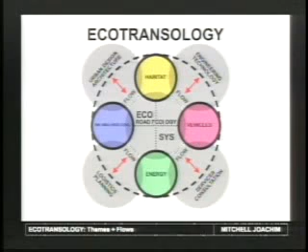So this is the beginning of this burgeoning field that we're calling transology, or eco-transology, which describes patterns of mobility. These are some of the fields and the contexts in which these fields operate. So there's this Venn diagram that's kind of showing some of the relationships, making this into one primordial soup of thought. And these are the four parts that I've just gone over that I'm going to discuss.

First part being the history, or the ideation, or the visioning of future cities. And then into the eco, which is really thinking about architecture and sustainability in buildings. And then transportation, then eco-trans.

So let's get into the first part, ideation, which is divided up into a series of challenges, archetypes, infrastructures, and deployable spaces. And finally, our own suppositions on smart mobility, or theories on smart mobility in cities.

Especially using technologies that have been around the Media Lab for some time.

The biggest issue we had to deal with was energy use in the United States. These are facts from the U.S. Congressional Budget Office dealing with the transportation sector. We divided it up into industrial, commercial, residential, but transport here is 29% of the consumption of energy in the United States. This is expected to double, as a common statistic.

What we were looking at specifically was intelligence to deal with something like circuity. Some of you must know this, but for the sake of this talk, circuity is getting lost, looking for parking, poor navigation, driving around, just not going anywhere. Instead of getting from A to B, you go from A to B to C to D to E. Eventually you get there, but it wastes a lot of energy.

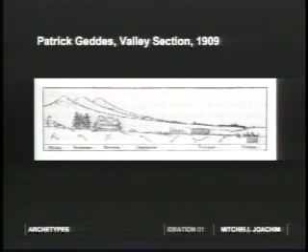A lot of the stuff I do in city theory has also been around for some time. One of the greatest thinkers we need to give credit to is Patrick Geddes and the Valley Section, where his position was that the first effective road, especially for freight transportation, was rivers in the world. Most cities are designed around rivers and pathways. Here he's talking about the interfaces of human operations, actors and agents on the landscape, cut through a section of a river from the mountainside all the way to the edge of a lake, for instance.

This becomes important later because we've decided to rethink that interface. Here we're thinking of the pickaxe for the miner, the axe for the woodsman, or fishermen with their fishing rods - but what are the transportation interfaces that affect cities and affect the landscape?

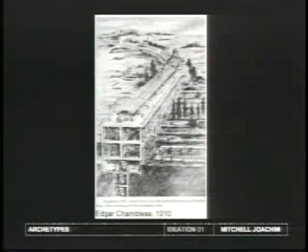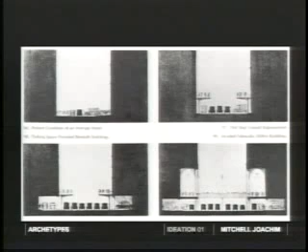These are some other visions: Edgar Chambless in 1910 thinking of these munificent road towns. Corbett, a congestion engineer - I guess he was a Columbia professor, really fantastic guy - also thinking about infrastructure in relationship to bridging, tall buildings, and transportation. His diachronic drawing shows sections of how the city would develop or evolve over time to deal with congestion and transportation, separating pedestrian use, and carving into the architecture to supply places for safe passage for people and families, and places for fast mobility, slow mobility, and parking storage.

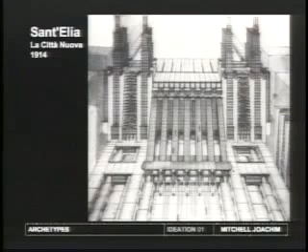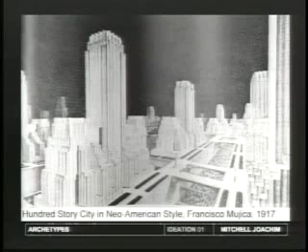Sant'Elia - big movements in the art world, Futurists especially - this is one of the best. This new city, as he was calling it, made a spectacle of mobility, where he extruded elevatoring systems outside of the cores of the buildings and obviated them into the architecture. Other views are a little more Nazi-like, with endless repeating 100-story towers and grand boulevards above them, and civic spaces inside, with this canyonated series of congested vehicles moving in and out. I think this is basically the precursor to the BQE.

And then a great transologist, Eisenhower, back when he was a lieutenant colonel, and his contribution especially to U.S. transportation. Some of you may or may not know about this, but he was certainly a thinker about mobility in the United States - even today we think of red and purple states and how he separated them. It started back in 1919 in his transcontinental motor convoy, where essentially as a military act, a war game, he said: what if we had to go from D.C. to San Francisco to defend the United States of America? Is there a road system that can do that?

So here he is trudging through the mud trying to show that, through moving tanks - or well, they didn't have tanks, but jeeps and armored vehicles and soldiers - it would take months to get across the United States to defend it.

This ultimately led to an act of Congress to establish the American highway system, especially after seeing what the Germans could do in World War I and II with the Autobahn versus rails. If you knocked out a section of the Autobahn, the Germans were running on it the next day or in hours. It was easy to repair a highway, as opposed to a rail system, which if knocked out, supplies would be cut off for a long time. So the highways in the United States were started as pretty much an emergency act of war to protect us. It's kind of a well-known fact, but maybe some don't know this.

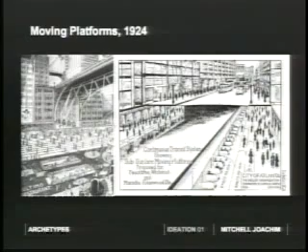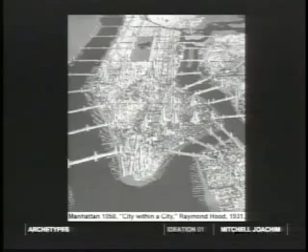These were proposed in Atlanta. And then bridges themselves becoming architecture and urban design. Here's housing built into bridge systems. This is an interesting view of Manhattan, Raymond Hood, thinking of clusters of skyscrapers connected and bridged, and then Manhattan also hyper-bridged with housing built into the transportation. So exactly who would be responsible for designing a piece of infrastructure that's architecture, of public housing, deals with multi-levels of mobility from trains to cars to pedestrians. It's been a problem for 100 years.

And of course, Norman Bel Geddes in Futurama, another view of the future. And Hilberseimer, escaping Nazi Germany, and his view of what we could do with Manhattan based on transportation. So here he is. I kind of love this sketch because of the chutzpah involved. He's wiping out Manhattan and replacing it with a big transportation node and then dotting slabs of housing in the center. Great. So when does this become interesting?

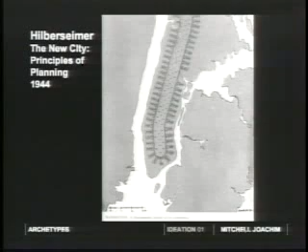Well, when you deal with a calamity like New Orleans, where the city is wiped out, and you have to rethink most of the city, how do you create a pedagogy, or who's prepared to really redesign it? It's usually groups of people getting together, but I think this is something that could happen at the academic level first. Today we do a lot of incremental phasing, and urban design is project-based. It's not entirely city-based. So that would be an example of let's start from scratch, or degree zero city design.

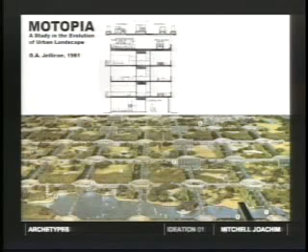Louis Kahn in Philadelphia, thinking of clusters of skyscrapers or tall buildings and housing combined with parking and mobility. So architects have been thinking about this. Landscape architects, Jellicoe's Motopia. Here are these nodes across a matscape, or just the land is in the switch fabric between civic places and housing and then mobility. So basically, cars move above and you dwell underneath.

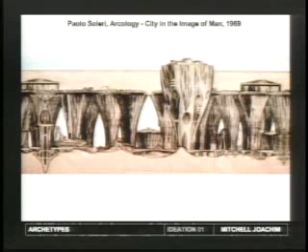Archigram, one of my favorite groups from the 60s, they were thinking about, well, let's just have cities themselves be mobile, or walking cities, and many other iterations of that. Soleri's Arcology - this guy's making mud pies in the Arizona desert, but he was certainly thinking about this miniaturization of the city into this very compact notion of infrastructure and dwelling.

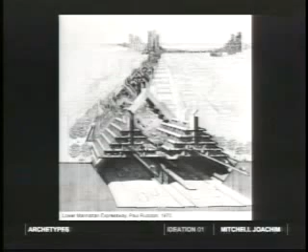Paul Rudolph, thinking of the Lower Manhattan Expressway. In this case, these topologies, and there's many others like it, but I'll use this one as an example, about the spine. So development along the spine that accounts for orientation, light, air, and then transportation underneath - slow motion transportation, local transportation, then fast moving transportation from region center to region center, and then, of course, in the background, clusters of skyscrapers connected.

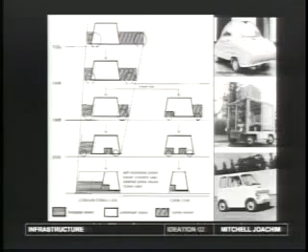And thinking also about intelligent storage of the vehicle itself, robotic parking systems, and robotic systems where the elevator and the car bleed into one. In this case it's a transcar system.

Hospitals use them, but they're leaving the core, right? The elevator core. They leave the realm of the circulatory space in the building and travel throughout it, then go back in. As a kid I was always fascinated by Star Trek, how they possibly navigated through these elevators through the Enterprise, as it clearly wasn't a vertical shaft—maybe it was something like one of these transcar devices, traveling through the floor space on a robotic elevator.

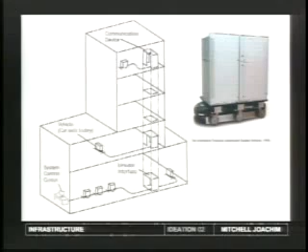How can we get rid of clanky metal boxes and this chainsaw-to-cut-butter mentality? So much energy is wasted producing a vehicle like this. The elevator itself is a really elegant system, especially from a physics perspective—you pay some energy to go up, but the counterweight gives it back when you go down. So elevators become super important. I'll show some of that later.

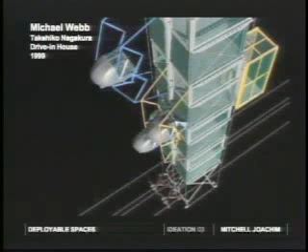Other variations on that theme where the cabin leaves the realm of vehicle propulsion and enters the space of, for instance, an apartment system that's also on rails. This was Takahiko, a professor at MIT. I had worked with Michael Webb on some of these animations.

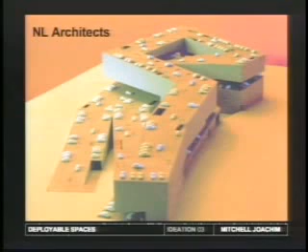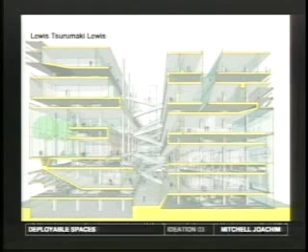NL Architects—these individuals thought the very topology of the building itself would be influenced by parking and transportation, or basically the car itself would form the architecture, the other way around. And Lewis Tsurumaki Lewis—you have to look carefully in this image, but in the interstitial spaces you have vehicle parking, and then your offices above it where you work. From an efficiency standpoint this isn't so great, but it's different when you start interleaving the parking program with occupiable floor plate into the building itself, as opposed to Marina Towers, which divides it in half, parking below and dwelling above.

It gave us some really good questions—cities have been designed around vehicles, at least modern cities, and before that they were designed around horses. So how do we design the car around a city?

Road ecology—Richard Forman, a professor of mine at the GSD, was a phenomenal influence in thinking about the vehicle and its effects on the road. I think road ecology as a discipline is super important, and would be part of this pedagogy too.

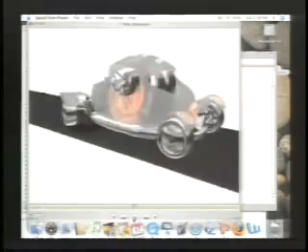So e-ink and organic LEDs would do some of these things, like social projection. So the cars can display something on the outside, like the Red Sox rule, or whatever. But when you start thinking of a field of these cars, you need human communication as well as vehicle-to-vehicle communication.

Back into it. And thinking of not only the vehicle itself, but the entire informatic of the cityscape becomes one. So it's not just a veneer, an intelligent veneer, but there actually gets to be solid and intelligent and actuated systems that are all speaking and talking in this future city.

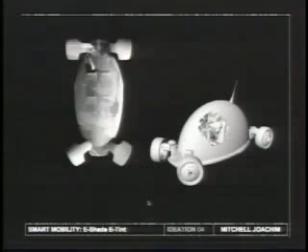It's probably not going to play again. Well, what you saw briefly was basically you can have a visor that would track the sun to deal with some environmental concerns, stop shading, or the skin can be completely opaque and transparent following the viewer's line of sight.

And now we get into the interface of the vehicle itself. So this matrix takes some time to absorb, and I'm not going to unpack every inch of it, but it's basically the history of the city versus mobility, or not versus, but aligned with mobility. We're calling it TUI, similar to a GUI, like a mouse and keyboard or graphical user interface.

This is a transportation user interface, and it starts from the foot and the hoof and the wheel, things that influence the shape and form of cities, urbanization, and pretty much the world. Our supposition is that after the rail comes what we're calling the net wheel, or networked wheels. We decided to really rethink the wheel for the car.

We put the entire solution space of the car, drivetrain, suspension, motoring, intelligence, everything happens in the wheel. And then you just add an envelope, and you add wheels to each other. And these wheels talk, and they're smarter than people at some level.

If I walked 5 blocks down and made a right, what's the name of that street? And is there a pothole there? Unless you've walked it every day, you wouldn't know that. But if wheels are talking and connecting to a municipal grid, constantly re-recording the cartography of the urban space, they would know something like that. They can warn wheels ahead of them: there's a pothole there, don't go there, etc.

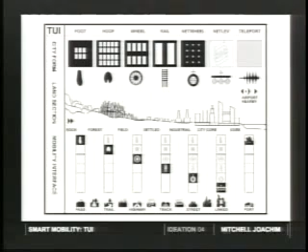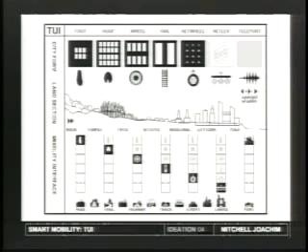Then here comes the wheel. Cities designed around the wheel are much larger and not so comfortable, canyoned spaces, and rail cities the same way. And then the net wheel, which is this intelligent, super-connected city. We're thinking this operates in the city core, downtown, between industrial areas, post-settled areas, to edge areas, and there'd be a linked system that would bring us into the 3D, or vertical axis, Z mobility.

We're tired of the precious metal box, right? Don't touch my car, don't scratch my car, don't look at me in my car type vehicle. Here we're saying it's a gentle congestion, touch, bump, rub, soft, it's okay, because we're going to get there faster and traffic is attenuated. You can think of it as moving like a bloodstream, oozing with passengers seeping in, seeping out... oh, there it is. So you can imagine mobility like this in the future with these soft cars.

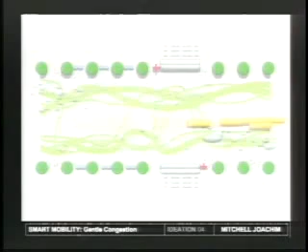So we had to go and build it. We started with the wheel and getting to the skin. Let's see some of that. This is showing it phasing into the city.

A lot of questions I get is, well, softer cars... we're already there. When you introduce something hard into the system, something that doesn't even have a crumple zone, barely, like a Hummer, which is this precious, super strong, metal, impervious box, you make everything else softer in the city. So you're kind of doing that already.

These vehicles are certainly... I think the reason for a Hummer is that you buy one for your wife, supposedly, so that when she gets into an accident, she kills everyone around her, but she's safe. So this is this kind of view of phasing softer, gentler, sheep-like cars into a city and dealing with things like Hummers that we know will take them out rather quickly.

But speed, again, is a factor. We're moving much slower in these cars. It doesn't need to go faster than 30 miles an hour in a downtown core. That's a shared ownership model.

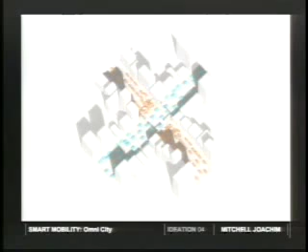But I should probably show this video. Here's saying what it's going to replace, which is command signals, gradient changes in curbs, light switches, all of these things that we're psychologically prone to following orders to. There's no real reason to stop at a light. We just think we're going to get killed, but nothing really stops us. So what if the cars really do stop you?

This is a car designed around the city, and then the city changes to readapt itself to a car that's adapting to it. So there's constantly an exchange.

Moving from regional center to regional center, this is looking at critical moments between tall building clusters, accounting for light and air, and then transportation. I've got to come back to that one in a bit, and a city based on that influence.

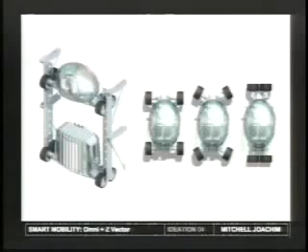So here's the beginning work on the wheel and its omnidirectional capability and its z-axis capability. You can see that it moves, it spins on a dime, laterally forward. It's talking to each other. It's based on the GM skateboard that's been modified, cut up, and made a little bit smaller. I think the powertrain for this was a fuel cell.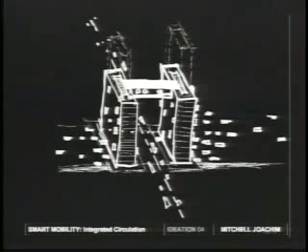And then the wheels can clasp onto rails and engage facades, and you'd have both passenger and freight transit inside these systems. We're thinking that it's influencing the city, right? So they're sticking to buildings, gliding over. Buildings are bridging, vehicles are bridging. So here's a first sketch of that.

Well, what exactly does that do to a skyscraper, right? So it took a year of research at Moshe Safdie and Associates, a really great firm here in Boston, where we started looking at tall buildings and, more importantly, questions we didn't really have answers to, which is clusters of tall buildings. That came really down to ecological relationships between cores, elevator systems, and skin, and then ultimately bridging.

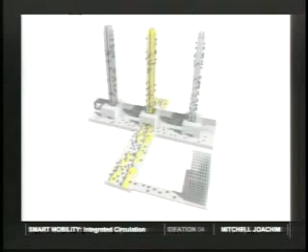So here's this supposition of the city of bits, all of these vehicles fitting into the city, moving up cores, fast sections for fast transit just through the basement levels, massive charging stations, floor plate stacking and bridging. There's a lot of benefits to bridging tall buildings, which I'll show later.

And the buildings themselves becoming actually mobile, with sections leaving the building core. So how can we do that? Because we want the building itself also to be mobile. So here it is kind of fragmenting up.

So let's get into the eco part of the architectural area and then into the cars themselves. This is just 3 quick projects I'll show you that I've been working on to think of 100% really sustainable or ecological architecture.

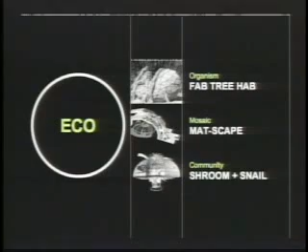This first project is called the Fab Tree Hab, which is about pleaching inosculate matter, or grafted sections of trees, to grow superstructures for housing.

The notion here is that sustainability as a philosophy is a little bit too status quo. You don't want your marriage to be sustainable. You don't want your relationship to be sustainable. You don't want really anything to be sustainable. It means just getting you through the next moments, or even a couple moments beyond that. But it's not evolving, changing, living, loving, growing. At some point you need to think of the evolutionary aspect.

So I'm thinking more of an ecological architecture, which is different from the sustainable philosophy. Ecology is a science, and here it's a science of horticulture and botany. This has been around since before Rome, growing trees together to form shapes.

Part of the work I've done at MIT was on CNC-controlled geometries—basically printing out complex geometries and marrying it to the idea of living systems, or pleaching systems, that we've been using in gardening since before Rome. Grafting trees happens in fencing.

So this is a notion of an entire community that's actually 100% living. No felled timber, processed industrial timber, or even transport to bring building products to the site would be involved. This is a 100% view of the future that's holistic and ecological.

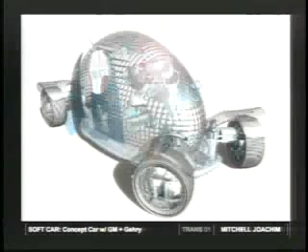So thinking of these super soft, informatic skins. In this case, it's made up of quilted ETFE pillows with embedded electronics, some starch foams that support various parts of the car, and then an internal safety cell that would not be edible. It would have to be something like aluminum to absorb impacts.

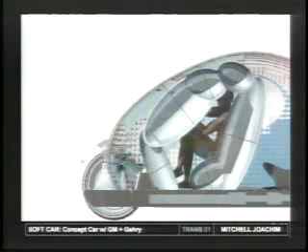But that helps keep the skin in tension. And thinking of the car as a series of, it's just air, right? It's all soft. It's an air quilt, and the seats are air bladders, with 6 points of safety using airbags. We know the benefits and constraints of airbags, but it was one early iteration. There's probably 50 or 60 iterations of this soft car, and I think the latest version is ready to roll out in November.

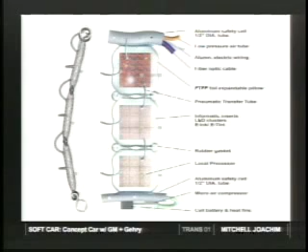So I don't have the final version to show you, but we will soon enough. This is a section through these ETFE quilts, embedding smart geometry in the quilts to give them more stiffness and structure, and transfer low pressure air between quilt to quilt from microcompressors on the car.

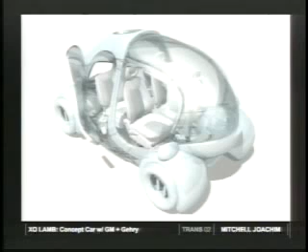And the XO Lamb car is another view of the super soft car of the future with brush wheels. I think the idea would be it's okay if you roll over children, like a Nerf car—it couldn't possibly hurt you. A lot of these things we were saying and doing, you'd get fired for if you worked at General Motors. But we did really say these things and do these things.

Instead of car refinement, we just rethought the car on base humanistic principles—like no one will ever die in a car accident again, not on our watch. Here's another version of the soft car.

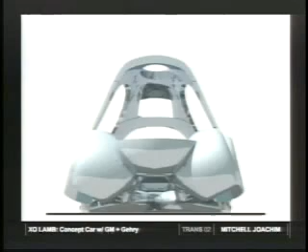In this case, we thought of a super safety mechanism called the friction belly. Here you think of the contact patches of the wheels—there's just those little points. But when, let's say, you've lost control or are about to be in an accident, the entire belly of the vehicle increases friction on the road to slow the vehicle down. So you can see the difference between those.

Then there are cars that expand and contract with these soft skins—here's an Exodillo version. Now, Frank Gehry—I was working at the office in L.A. as an architect for a cluster of skyscrapers in Brooklyn called Atlantic Yards. But for this project, which I started on, he was the lead author and designer in the beginning. At some point there was an argument over design fees, so I don't know where he stands on that. But in this version, and in many versions, he had some really brief comments about what he thought. He said this one looked like Nemo's submarine—get rid of it. So we got rid of it.

There's a 3D print of Nemo's expandable submarine, and here you can see a close-up. This was for Popular Science—the wheels with the suspension. It's basically a hubless wheel with all the car we can fit inside it. And here's another version.

That vehicle, and things about the structure in relationship to accidents and dynamic cabins—we had a young physicist in the group, an 18-year-old whiz kid, Louis Basel, who said, hey, we got to rethink the physics of the car, especially in accidents. We absorb a lot of impact and velocity in crumple zones. Well, what if the cabin was dynamic and moved within the line of force of the human body? The doctor said, well, that's a good idea, let's think about it.

So I started these drawings rethinking the structure of the car, which is essentially a brick on wheels, and thought of a suspended cabin from one particular pivot point in a wishbone-like truss system. So you just hang the car on its wheels in this truss, and the soft egg inside can move in any direction with the same vector of force as the impact. So with the initial impact, you move with that line of force.

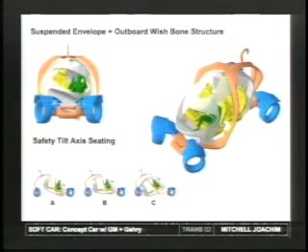And this became what we call the soft bone car, with an added hook for storage. Essentially it's the same kind of soft cabin, suspended though from a wishbone structure, with a safety cell around it, of course.

We got tired of this continuous aesthetic of softness and wanted a self-healing fabric for the cabin of the car. So we rethought the overall aesthetics of matte or soft cars, similar to sneakers. I went through a series of iterations of quilted car patterns that are okay to scuff, okay to rub up against.

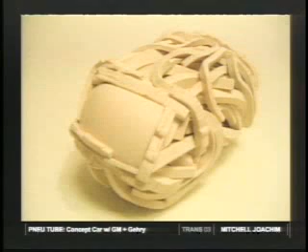Here's a pneumatic tube version, and the windshield and windshield wiper. For car designers and engineers, the holy grail of transportation engineering is the windshield wiper—it's on the space shuttle, the Concorde, every vehicle. If you can think of a better solution for dealing with all weather conditions, let me know. Fifty years of doctoral study on windshield safety glass made that one point of the car hard to change.

We looked at a lot of technologies. But besides the windshield, the rest of the vehicle is super soft. We were in line with Reebok, who came by as another sponsor of the lab, so we thought: let's make sneaker cars. What are those guys doing with the fancy sneaker technology we're purchasing every other year or so, and how do they do that?

The most sneaker car designs I've seen basically take the look of a sneaker and style a car after it. We weren't concerned about style—it was about material, softness, scuffability, and economics. They're cheap, so why not have a cabin you can turn over every couple of years, made out of sneaker-like material with the same sneaker-like aesthetics, stitching and materials.

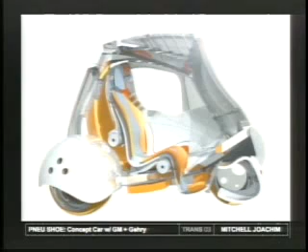So you have a zipper door—you get in and out with a zipper. I really love that one. Then another model where the shoehorn was the seat that stretched the rest of the envelope of the car. This is a three-wheeled vehicle that's omnidirectional—of course all of these are omnidirectional—really getting the footprint of the vehicle down.

Here's a planimetric view cut showing the section of this cabin in this future car that's wireless, drive-by-wire, omnidirectional, a networked wheel vehicle made out of sneaker-like skin.

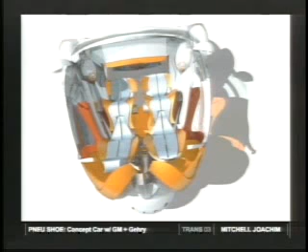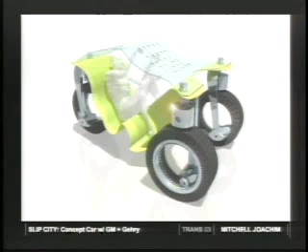And impossible fantasies of shape memory alloys—thinking of what's the smallest footprint we can get for these sneaker cars. Here, one layer would memorize the contours of the body, and when you want to store it, the entire car folds up. How does it support itself? Well, it's intelligent tensioning between the wheels that keeps the skin stiff.

Thinking of even smaller footprints, which is standing—this is the car for downtown, kind of like an iPod car or cell phone car. It's a leapfrog technology; cell phones have changed a lot. We think: I'd like to just get to some place and not have to worry about my transportation at all. So here's this kind of standing or somewhat squatting car. The reason is that it's the smallest possible footprint in plan the body can make.

As opposed to sitting, if you look at a drawing there are actually more protrusions, so this hides your feet, which normally stick out depending on the proportion of your body. These are the I-stand vehicles, also using the same tensioning between intelligent omnidirectional wheels that are networked and stacked. Here's the stacking part—I'll show you some iterations of the stacked car.

This is the wheel technology—I think this is Peter. Here you can see one of our wheels; I think Louise is riding it. Basically the whole vehicle is in the wheel, and there's just a battery he sits on top of, plus a bicycle wheel. This is one wheel that would be added to four wheels, and he's not wearing a safety helmet—we're just speeding around the Media Lab.

This is showing he was still—this, I think, was the second iteration. Each one we've been patenting. There's the wheel car zipping around.

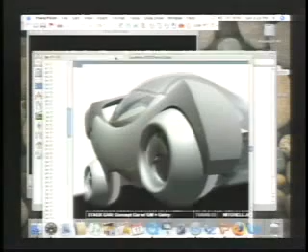So here we are. So this is the rethinking of the stacked car.

These are earlier iterations, getting them to the smallest possible footprint. So starting with the Smart car at 94 inches in length, and here's our stacked car. So in its unarticulated form, it's the exact same size, more or less.

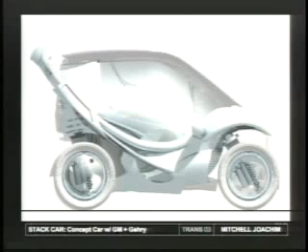So when it stands up to allow the driver for ingress or egress purposes to leave the realm of the car, it gets even smaller than a Smart. And it's everything - there's no traditional dashboard or the usual things you find inside the car. It's intelligent, so it changes the whole way you deal with interior design of vehicles.

And here's a group of them standing. And this canopy opens to protect the vehicle from the weather and for you to get in and out of it. And here's a series of cars that are not exactly for the city, but based on that same principle of the soft car.

How do we start selling these things to people? So we thought of the semiotic pulse of sneakers again, and in this case, superheroes, or Michael Jordan. So we thought of the Michael Jordan version of the car that didn't exactly ask all the same relevant questions about environment, but really used the same technology to make these things fun to drive.

It's mostly when people see these, they're like, well, there's a lot of robotic control, a lot of 'I don't drive anymore.' There's no fun in these frickin' city cars. So how do we put the fun back in the vehicle?

So we said, okay, fine, we'll think of athlete cars. We'll give you cars that are fun and still soft and sleek and that ooze. So we imagine this vehicle is something like an athlete car, but more about agility or gracious movement, like skiing or dancing.

And we thought of two drivers in tandem inside the canopy of the car, working together to drive. So we articulated this chassis with multiple degrees of freedom.

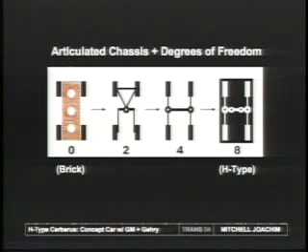For the engineers in the group, they might like something like this, but the traditional structure of the car is a brick on wheels. By adding in various pivot points, we can get the car to constantly be on the ground in all cases, dealing with cambering, turning, etc., with 8 degrees of freedom in what we're calling the H-frame.

So here's one section of the car that I did, the Jordan car. This is one part that moves like a swarm. It's in separate parts, and it's connected.

Think of two motorcycles strapped together, and you share your movement space with another driver.

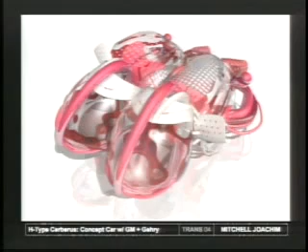So this is the back view of the Jordan car, this H-type vehicle with fluidic muscle controls, which would be some of these things you can see here attaching to the wheels, super soft canopies, and then the seat fitted around the driver, mapping the motion of your body to how the car would like to move.

There's another project called the wearable seat that Patrick's working on at the Media Lab.

So there's a Gretzky version of this car. You can see here's the seat and the driver inside the seat, and the seat is mapped to the driver's body and fitted right into the vehicle. Then two seats are added together. There's a frame, and Festo muscles are doing most of the control, which is a fluidic muscle technology.

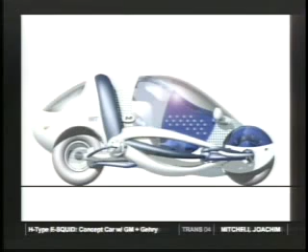Here's an example of the Gretzky squid-like soft car, which is very fun to drive. I have a video of it moving, but there's possibly some danger of motion sickness. You don't have to go fast in a car that's moving with 8 degrees of freedom. It's two motorcycles strapped together, and you're getting a lot of motion in this vehicle—certainly fun to drive.

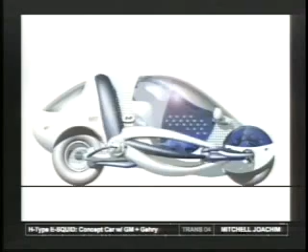We called it, in this case, another iteration, the G-Race, or graceful motion car. Here you can see the two pods of the car strapped together. I had a lot of fun making these designs, so you can check this one out.

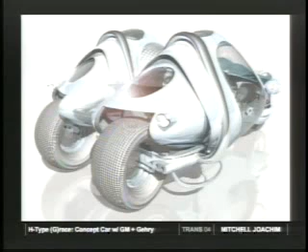That's pretty cool. And this is sleeves, thinking not so much of shoe technology, but sports gear technology like football armament, or whatever they call those pads. But yeah, it'd be the same kind of thought.

Finally in this section is more about human-powered mobility—in this case, soft flotillas, James Bond-like flotillas that become river gyms that move on loops. So the human buttocks basically provides the energy to move these cars, which trickles down to a battery that supports the powertrain to move.

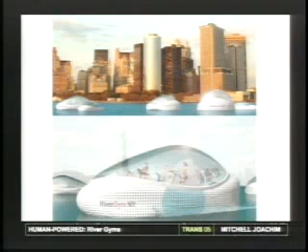So there are people that can go to work every day and get a workout, and there are people that can just say, I'm not going to do that—I'm going to sit there and watch you work while I go to work. Depends who's got the moral right.

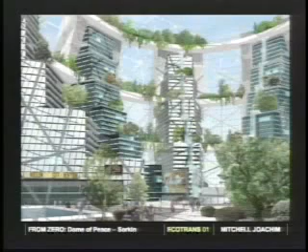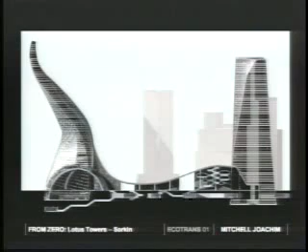Finally, the synthesis of a lot of these ideas—this combinatorial event of the skyscraper, the city, mobility from clanky boxes and elevators to softer kinds of elevators, skyscrapers, and cars. This is the first thoughts I had done with Michael Sorkin's studio, rethinking this kind of condition in the World Trade Center years ago.

So this is a multimodal station, thinking of these clusters of tall buildings and really starting to question how we can change the core of the skyscraper. Ever since Otis, skyscrapers are always going vertically up and down. What can buildings that kiss, touch, link, or bridge do to the core relationship? So this is the first kind of visioning of that.

And then getting into the research work—this is going to show you some serious slides, but design research is asking questions you don't know the answer to, and it ultimately leads to some serious mathematics. I'll go through it pretty quick, but we asked: what are tall buildings, and what can we say about them in circulation?

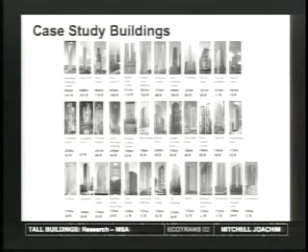It's a real case study here—not that anything else wasn't real, it's just a different kind of analysis. We concentrated only on buildings above 30 stories that had been through the rigor of construction. We looked at their circulatory systems and said we can say, without a shadow of a doubt, what the advantages are of certain geometries in section and profile for their circulatory systems, such as in relationship to the skin or in bridging.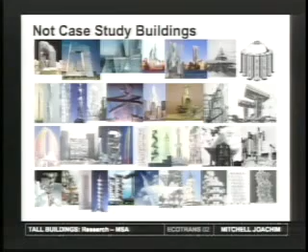These are the non-case-study buildings—things I really wanted to look at, but we decided were too hokey to get into. Because we're in Boston, this one might be interesting: up in this corner here is Gillette, the razor guy. He was thinking way back in the day of clusters of skyscrapers connected underneath one roof for housing, in some commune-like thing—fantastic visionary. I don't know how razors got into his world, but which is great.

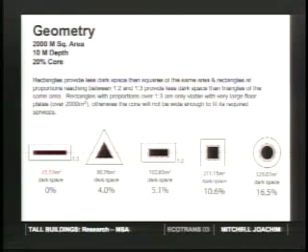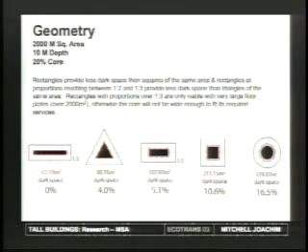So we looked at the core's relationship to daylight, and one of the things I can say is that through some basic math and simple computation, I could say without a shadow of a doubt what the most desirable geometric shape in plan is for a circulatory system in a skyscraper—a rectangle roughly at 1 to 3. What this shows you is the dark space, the space you can't light naturally. Natural daylight is more ecological for a skyscraper than using electrified illumination.

Then in section, the same studies looked at all sorts of sections—tapered versus extruded—all in relationship to moving the elevator up and down. And then, what happens when you have more than one of these tall buildings.

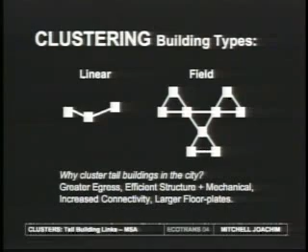So there's clustering, bridging, or linking mobility between linear versions and field versions of skyscrapers. Mobility between skyscrapers and their relationships were important.

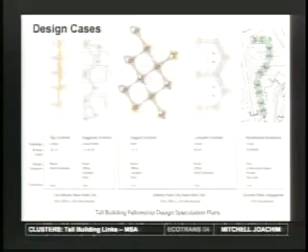We did 5 design case studies to prove our theories with different programs and in different parts of the world, from Singapore to New York, and tested our principles on super bridging and sky surfaces and the introduction of green technologies. For instance, in the Con Edison site, the turbines would provide about 10% of the power needed for these buildings.

That would be sold back to the municipal grid. That was the advantage of bridging, in the cross bracing here, and then upper story views. And 5 benefits of bridging.

Things like maintenance, rerouting - for instance, if your air conditioning went out in one building, a bridge helps you reservice it. Diffuse structuring and lateral loading is an advantage.

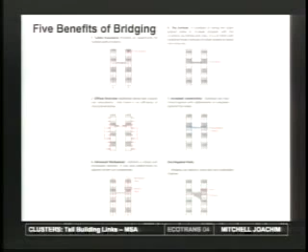Safety assurance - imagine if the World Trade Centers were bridged. What would be the frequency of bridging those buildings? Who would design for that? What would be the most efficient frequency of bridging in the Twin Towers? How long would it take them to fall down if they were bridged? And why didn't we bridge them in the first place? Well, they certainly would have stood up depending on the frequency, and there are thresholds that describe that.

This uses a structural technique called the diagrid, which uses about 30% less steel in bridging. All of it dealing with circulation, then looking at elevators, express elevators, zoned elevators in relationship to bridging, drawing the plans and details of those things, then diagrid systems.

Here, this is the Freedom Tower, and this is Battery Park, rethought with the same FAR, but in this case with bridge skyscrapers. And then thinking of elevators that are a little more ecological because they skip stop - instead of stopping on every floor, you go up one or down one, or up 2 and down 1, looking at the efficiency gains of such things.

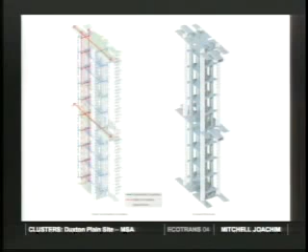All these lead up to some fantastic visions of what we're thinking the future skyscraper would be, but this research in and of itself is useful. Here's an armature that describes bridging in relationship to skip-stop elevatoring, and a housing solution for that - microclusters, vertical neighborhoods, and then bridge buildings based on elevator armatures.

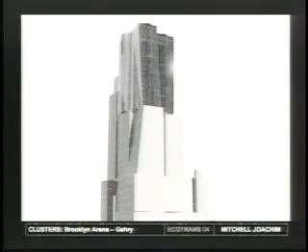And then taking these ideas - efficiencies in circulation and ecological circulation and bridging - to Gehry's office and his massive project in Brooklyn, which was, I think, 16 skyscrapers in Brooklyn Atlantic Yards that were going to be connected to the subway, connected to each other, bridged all around the New Jersey Nets, or New York Nets now, arena, and rethinking skyscrapers. Now, Frank's office, we weren't concerned with ecology.

I think I have to be rather straight about that - he's a formal-driven kind of individual. It's more sculpture than it is dealing with, for instance, the maximum amount of daylight you can get in one of his skyscrapers, which is really important to me. Working and consulting with him, I think he was just more interested in its aesthetic. Not to say that that's not important - it's just a difference in concerns, and a pretty important one.

So here's a view of Atlantic Yards, a cluster of skyscrapers connected about the 8th story, wrapped around a basketball arena in Brooklyn, and it was terribly anti-ecological. It's not an issue, it's just its sculptural form, and personally I'm excited by it.

But for instance, the 8th story sky lobby - there's not a building ever constructed on Earth that's bridged or has a sky lobby on the 8th story. It's completely inefficient. So that was one of the things we were able to argue about, but ultimately I think it wasn't really a concern.

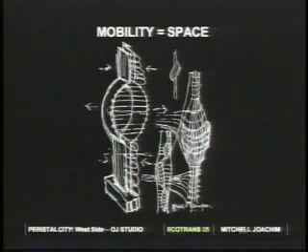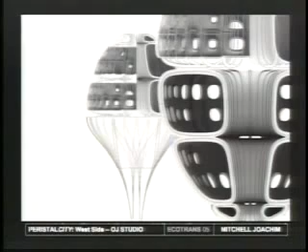Our solution was what we called peristalcity, using fluidic muscles or some level of integrated pneumatics. We'd say the elevator is your space, and you move in an intelligent field of elevators slowly up and down inside a cluster building on an armature. The pods inside the elevator span about 4 stories of elevator space, so you don't get out of an elevator into a space - you're always occupying the elevator, slowly moving up and down to account for light, air, natural ventilation, and the views you would need. This is the muscle skinning system of that.

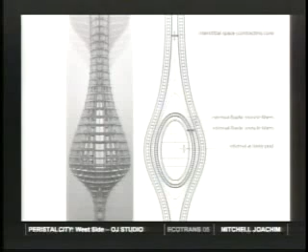This is a diagram of contracting cores and the interstitial spaces with the fluidic muscles that allow this thing to be swallowed up and down. This is a movie, rather fast, showing you the relationship of these super soft elevators.

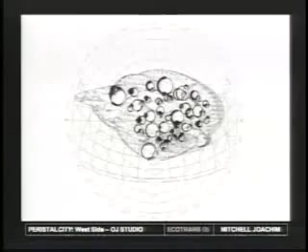This is just a future proposition, because the previous facts give you what's called inherent buildability. This is off-the-shelf stuff that works. This is what I would call heroic feats of architecture, which is, let's think of something in the future.

I give you both. And the final slide here is this peristalcity, these clusters of super soft elevators moving up and down vertically to ascend to a sky surface on the top.

And these are the conclusions from getting the energy challenge to inherent visionability for this new field we're looking at, eco-transology, and then the social aspects and linkages, or the integrated approaches. I acknowledge a lot of these folks and engineers that worked on these projects with me.